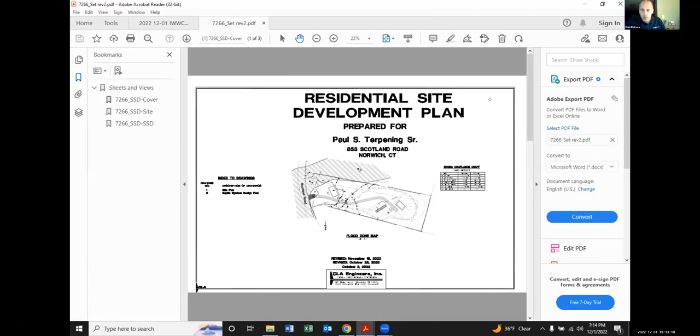It's not letting me do it yet. All right. All right, for the record, my name is Bob DeLuca. I'm with CLA Engineers. I'm representing Paul Terpening. He owns property at 853 Scotland Road. Let me just try to make this a little bigger.

This is the cover sheet. The entire parcel is about 2.7 acres. If you drive by there, if you're familiar with Scotland Road, I did some work. The next house is Oakley, right past this on the right. I'm not sure who's across the street, but there is a shed and a garden out front right now, close to the body of water. So what he's proposing is a driveway to access the property, and at the rear of the property to put a 2-bedroom house and a septic system and a well.

There's 4 intermittent watercourses that run during the wet season, typically during the spring or wet time of year. They don't always run. So those would need to be crossed. We're proposing crossing them with a pipe for each one. The wetlands themselves are not being disturbed, but we're in the upland review area.

So we've provided E&S measures. This plan has been reviewed by the town engineer, the city engineer. The Department of Health has signed off on the septic system. And I believe we've addressed all comments that have come from both the town zoning office and the town engineer.

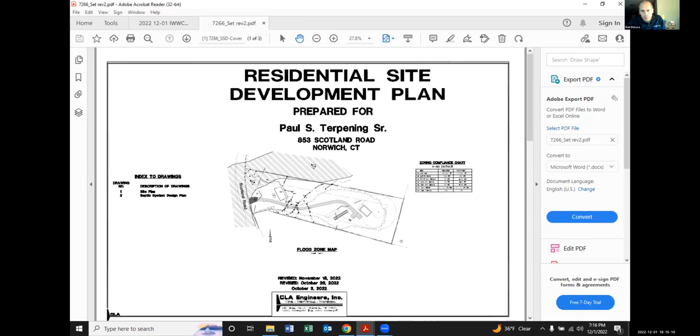This is a blow up, a little bit bigger scale, shows as you get into the site, there's some grading that will need to be done in order to get the driveway in, and the house will be set outside the 100-foot buffer.

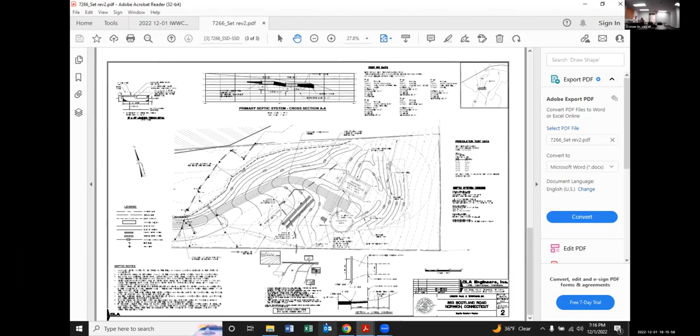But the driveway and grading will happen within that regulated area. Is there anything else, Dennis, you think I should touch on? No, I can, if you want to give me the screen back, unless Dan -- sorry, anybody has any questions related to the plan itself before I take the screen back. Brandon or Pete?

Were there any concerns from the town engineer? Yeah, we shopped it around to the different departments and the city engineer had a number of comments that have all been addressed as of the drafting of my memo. I can bring up different comments if you'd like, or Bob can address what they changed in the plan.

I know the main comment was going from 8-inch pipes to 12-inch pipes for the 4 crossings. Correct. We provided some drainage calcs. I think there was some comments related to the paved apron, the driveway. Yes. But that's about all I can remember at this point.

So I just want to understand, if I could, this is Brandon Hyde for the record. I couldn't really see the map since I'm on a small laptop here. I apologize. It mentioned everything was in the upland review area, yet there's crossings. I couldn't really see on the map. So the crossings are of a wetland or an upland review area? They're intermittent streams, which are regulated by you guys, but I guess technically not a wetland.

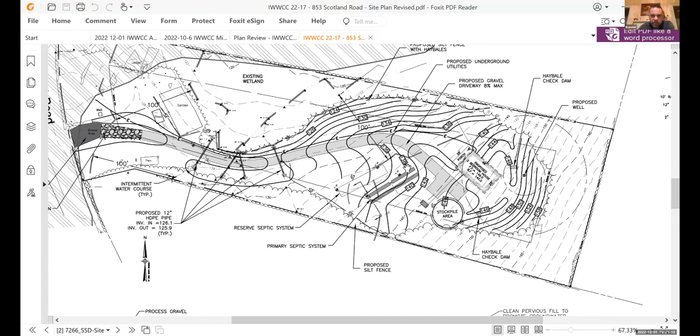Yep, okay. In the hatch marks, the diagonal lines above that - normally I would see that on a plan as some sort of wetlands delineation or something. What is that indicating? Which line are you referring to, Brandon? All the top lines, where it says existing wetlands, above that, and then all the way out to the road.

It goes into the road. That's why I was confused. It's the flood zone. Okay, it's flood zone, I knew it indicated something but I couldn't see what. There we go, flood zone. Now I see it, okay. I thought that was the wetlands, that's why I was confused, how that could go across the road and all.

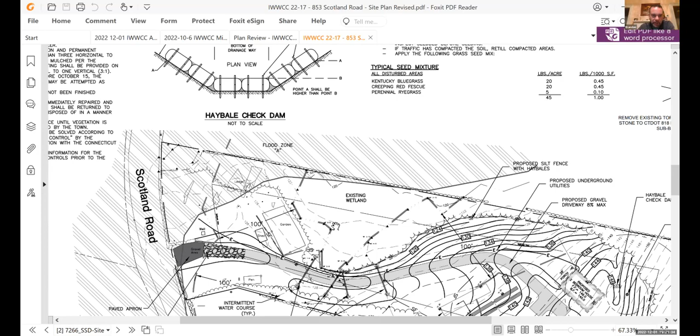The flagging is kind of confusing when you flag those intermittent streams individually, and there was a little confusion with the flags that we need to clean up on the original plan.

This is Pete. So the septic system will be located in or outside the upland review area? Outside, outside, okay. Yeah, you can see there's a 100-foot buffer line there, just downstream of it.

And I suppose last question, the wetlands to the left of the driveway pulling in, I guess maybe north on this plan, if it's a north indicated plan, has no valuable wetland soils. How about the wildlife? I mean, without seeing this site, it just doesn't have much value. Is that correct, Bob?

I'd have to defer to my soil scientist letter. He did mention that it was a fragmented wetlands, but I'd have to get back to you on that regarding its value.

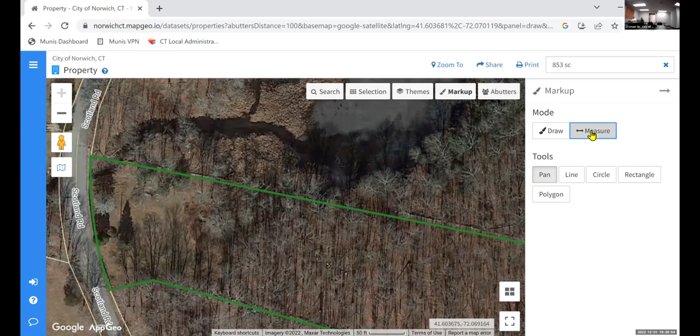So I just want to, there you go, so there's the pond. So roughly, if we switch back, I don't have a scale on me, Michael. I can scale something if you point to what you want me to scale, Dan. Okay, Michael, you mean so the driveway is generally around here? From up to where you can see the pond.

So the property boundary looks like it's almost at the edge of the pond on the GIS right here. You can see the brook coming in from the west side, into the pond, and you can see that pretty clearly. So what is the distance between the northerly boundary of this property and the pond itself? If we're only considering the wetlands on the southerly side of that green line, what's on the other side? The brook running into the pond, and is this going to have any effect on the runoff into the pond?

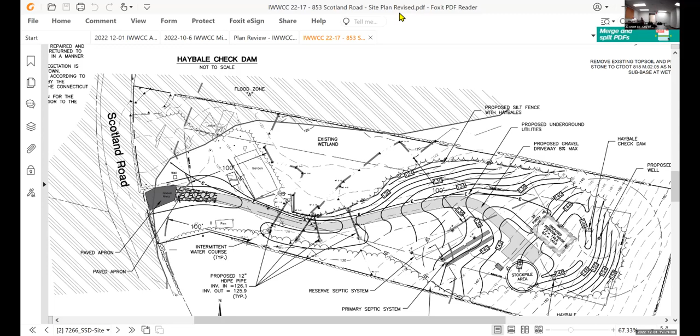If you want to know the distance to the closest portion of the driveway to the pond or that stone wall, it's about 80 feet. You can see that the pond is not that far away, so what is the protection from any runoff from this property into that pond or into the brook itself up near Scotland Road? I just want to know if that's been taken into consideration when these plans were made.

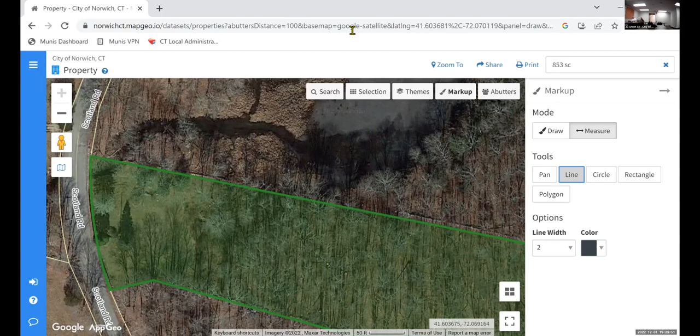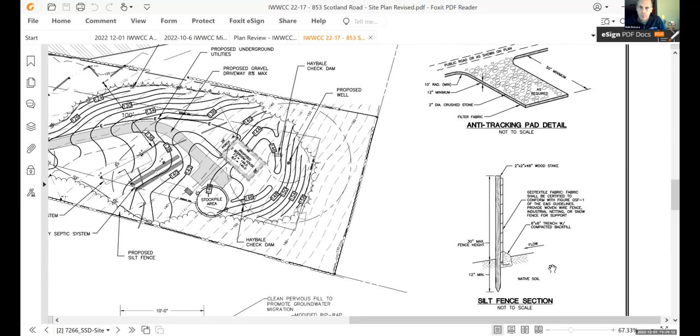It has. There's silt fence with backed hay bales on that side in particular because of the slopes, and that was a concern during the design. Okay. Yeah, that's the only matter that's of some concern to me.

So Michael, if you follow the hand on my cursor, the silt fence and hay bales run all along, kind of where I'm moving the cursor here, on that northerly side, the edge of the clearing limits, all the way on this side of the garden, splitting between the garden and the shed that are there now.

Is the driveway going to be paved? No, it's a gravel driveway. And the house is far enough away from that pond that it isn't that much of a concern to me. It's just that where that mobile home used to be located, it was very close to the pond, and there was some kind of hose or pipe leading from that mobile home into the brook. So as long as all that's going away, and the pond's protected and the house and septic system are far enough away, then I'm okay with that. I just wanted to clear that up.

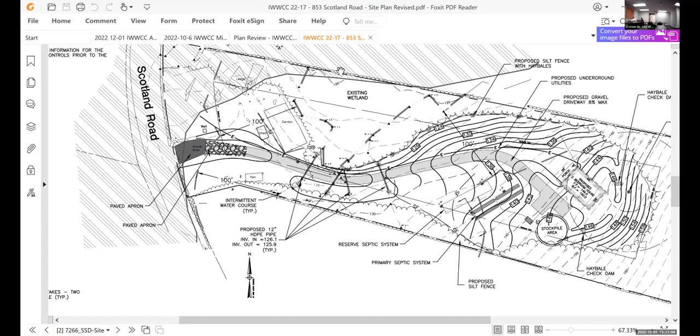Any other comments or questions? Hearing none, is there a motion? If this is a significant activity or not?

This is Brandon. I move that this is not a significant activity. IWWCC 22-17 is not a significant activity. Is there a second? I'll second. All in favor, please state your name and say aye. This is Michael, aye. Brandon, aye. Pete, aye. Rick, aye. Unanimous. Motion is approved. Thank you.

So before you vote - oh that's right, now we have to approve or disapprove the project. I'll just run through this real quick, get ahead of myself. As we talked before, it was shopped around to various departments. All the comments were addressed satisfactorily.

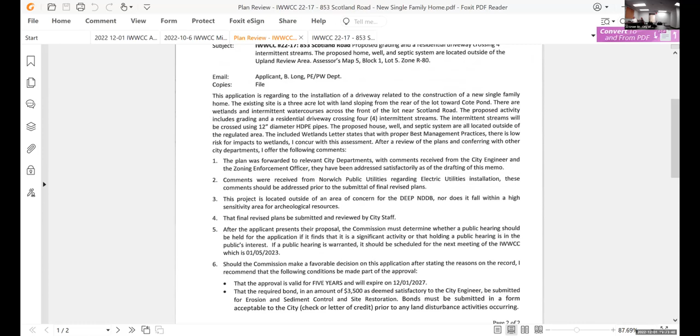City engineer is good to go. The zoning enforcement officer is good to go. I'm good to go. We did get comments late from NPU regarding the electric utilities underground installation - those would need to be addressed before final revised plans are submitted. As mentioned before, it's not an area of concern for DEEP or archaeological resources. I would just ask that if someone does decide to make a motion, we can waive the reading of the conditions in my memo, but they'd be made part of the motion.

Well, I'll waive that. Go ahead - is there a motion to approve and waive the reading of the memo? Second. Who initiated the motion? Okay, I made the motion. Michael made this motion, Brandon Hyde, second.

All in favor? Brandon, aye. Brandon, yes. Michael, yes. Peter? Aye, yes. Rick, aye. Unanimous. So moved.